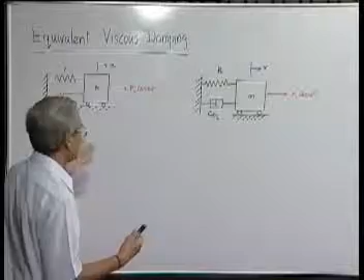Let us take a particular case, it can be anything, like a Coulomb damped system. Here the energy dissipation mechanism is different, it is not viscous, and the equations we get obviously are not linear equations that can be readily solved. We have solved the free vibration problem using various techniques, but suppose such a system is subjected to a harmonic excitation, what will be the response if we have to find out?

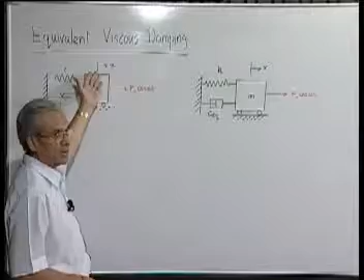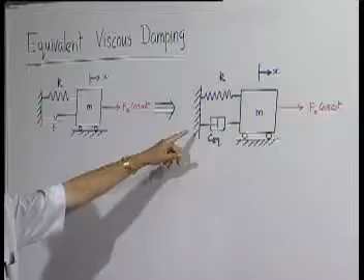So one approximate way of managing this kind of problem is to convert this system to an equivalent system where the stiffness, mass, etc. are the same as the original one. Only thing we have done is the Coulomb damping has been represented by a viscous damping here with a coefficient of damping C equivalent. Now what will be the condition for this equivalence?

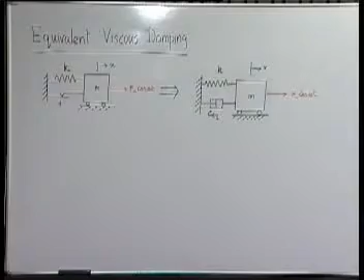One obvious thing that comes to mind is that the job of this damping mechanism is to dissipate energy. So for the same amplitude, whatever may be the dissipation of energy per cycle, if we maintain that as equal in the two cases, we can give some logical support to our consideration that this is an equivalent damping mechanism.

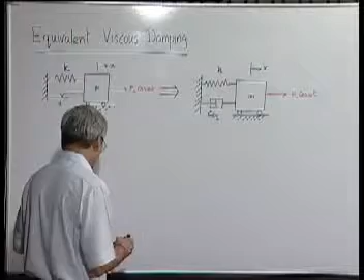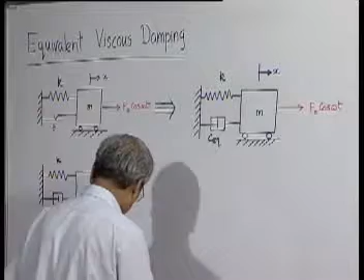So to do that, let us first find out, in case of a viscously damped system, what is the energy dissipated per cycle, with amplitude of displacement x, when it is subjected to a harmonic force F0 cosine omega t. What is the amount of energy dissipated per cycle? Here the only place where energy is being dissipated is this dashpot part, neither here nor here. So let us see how much energy is dissipated in this dashpot part.

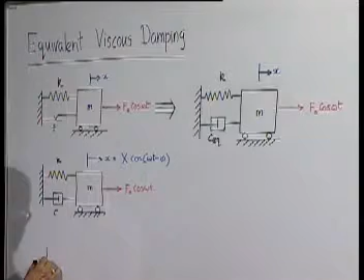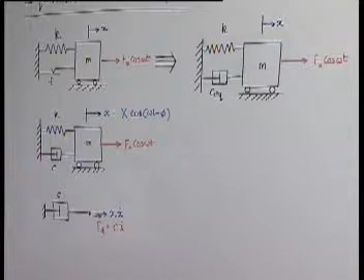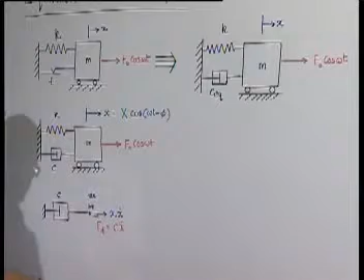Now at any instant, this position also has a displacement x, velocity x dot, etc., and the force acting here, we call damping force Fd, which is equal to C into x dot, where C is the coefficient of damping in this dashpot. So at this instant, if it goes by an elemental distance dx, and this force actually acting on this point is in this direction, since this point is moving in this direction, it is subjected to a drag which can be represented as this. The energy lost due to this drag force because of this displacement dx will be dEd equals Fd into dx.

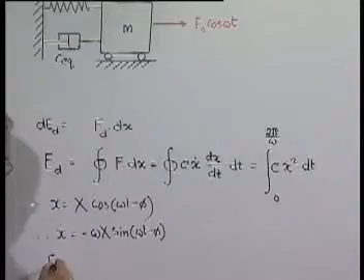So per cycle, energy dissipated will just be the integrated form of this for a whole cycle, Fd into dx, which we can write as Fd is nothing but C into x dot, and dx can be written as dx/dt into dt, and therefore this can be written as C x dot squared dt, t varying from 0 to a time period. Time period is nothing but 2 pi by the circular frequency omega. Now we know that x is capital X cosine omega t minus phi, so x dot is nothing but minus omega X... substituting it here, we get Ed equals C omega squared X squared sine squared...

This is integrated over a full cycle. We know this can easily be written as C omega X squared sine squared theta d theta, theta equal to this, for a full cycle from 0 to... we can make another transformation, making sine squared psi d psi from 0 to 2 pi, and this is nothing but pi. I'm not going through the detailed calculation, it's a standard result in trigonometry. The energy dissipated per cycle is pi C omega X squared.

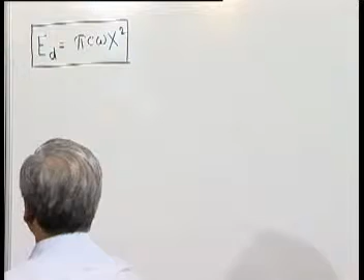Now here, therefore, the energy dissipated per cycle will be pi C equivalent omega X squared, and the actual energy dissipated in the real system will be Ed. So therefore we can always write that the equivalent damping coefficient will be the energy dissipated per cycle in the real system divided by pi omega X squared.

If you use this expression for the damping coefficient and use the results of the standard viscously damped single degree of freedom system under harmonic excitation, we can get the result. But before we apply it to this, let us also find out whether it matches the energy input.

This is the amount of energy dissipated per cycle, but since the system is in steady state, its amplitude of oscillation does not change. So the amount of energy dissipated per cycle must be replenished by the energy input by the exciting force, which is doing work on the system. That can be easily found out: the amount of energy input per cycle is nothing but F into dx.

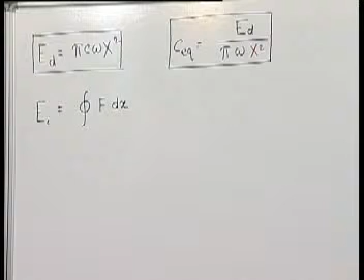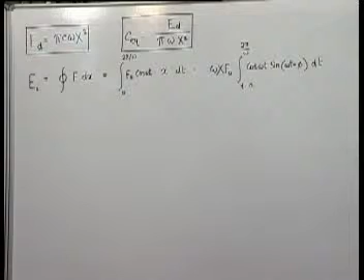F is the applied force, and this is again nothing but... and finally we know x, so x dot is already here. So this will be, and this minus sign we need not keep here. So that is the energy input, and if we solve this integration, we will get the result by standard result again, which will be pi X F0 sine phi.

So we get two different expressions, one for energy dissipation, other for energy input per cycle. The obvious question that comes to mind is: are these the same? It must be the same in the steady state. So therefore one has to substitute the expression for x and phi.

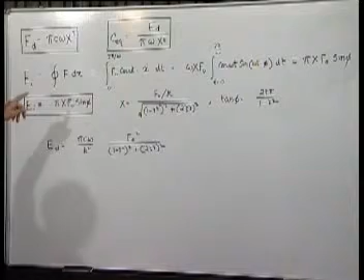Using these two, it can be proved easily that Ed and EI are the same, and trigonometry, so I am avoiding it. You can show that Ed is equal to, when you substitute the expression for x from here, this will be the expression for Ed. Similarly, when you substitute, sin phi can be found out from tan phi. It will be the square root of 1 plus cot square phi, inverse of that. So using that, one can also show that this will be the same thing.

The algebra one can satisfy himself. So therefore, Ed is equal to EI in this steady state, which is a very obvious thing, because otherwise it will not be in steady state.

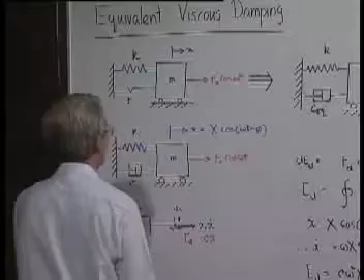So the technique for solving a problem where the dissipation mechanism is not viscous, and such a system is subjected to harmonic excitation, and we have to find the response: it is first better to find out the energy dissipated per cycle in the real actual system, then find the equivalent damping coefficient for a system where the energy dissipation will be the same with viscous damping, and then assume that system will have a similar response, though the results will not be exact. It will give us only an approximate idea about the response of the system.

So if we apply this, for example, to this particular case with Coulomb damping, what will be the response? Let us try to see. Let us solve this problem and find out what will be the oscillation or the response.

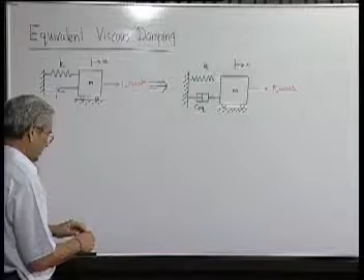Now, first is to find out C equivalent. How did we find out C equivalent? That is the total energy dissipated per cycle in the real system divided by pi omega x square. How much is it, if suppose x is x cosine, that kind of thing: if the amplitude of oscillation is capital X, then for each half cycle the displacement of this Coulomb damper is 2x.

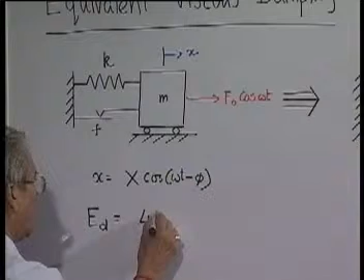So energy loss will simply be 2Fx because the friction force is constant. Similarly, on the other half cycle it will again have another displacement which is 2x, and again the energy dissipated will be 2Fx. So in total, the energy dissipated per cycle in case of this Coulomb damping is nothing but 4x into F. This is the total displacement and this is the constant friction force, which is opposing the relative motion, and so 4x into F is the energy dissipated.

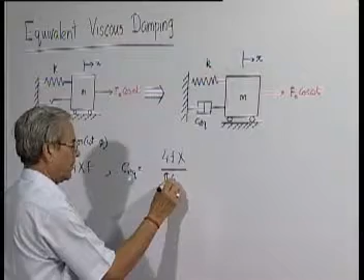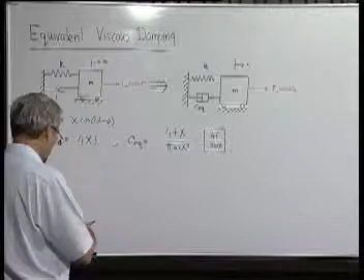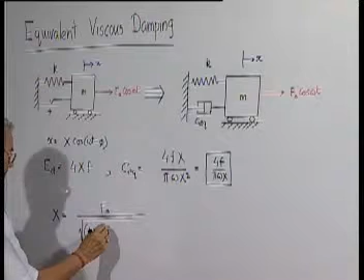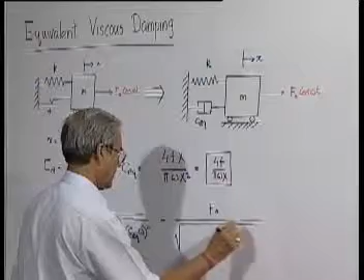We will use a slightly different form of the result. This is the amplitude of oscillation. Phase difference we are not interested in immediately. So this is where we have applied this equivalent damping coefficient. Now substituting this, C omega into C equivalent into omega will be simply this.

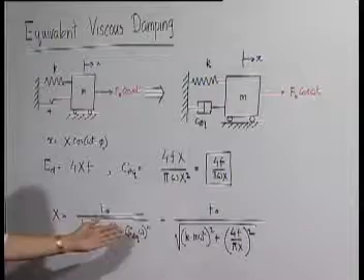So what we get is actually an equation in capital X, but remember we should always use this approximation symbol. So squaring both sides, we get capital X square is approximately equal to... and from this we get X will be approximately equal to... so this is the expected amplitude of oscillation of the Coulomb damped system when subjected to harmonic excitation.

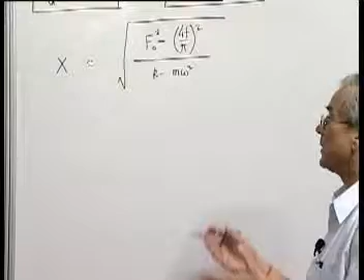But we have to always keep in mind that the result is very approximate, and all the characteristics which we find, for example here it is found that if f0 is less than 4f by pi, it will have no amplitude because it becomes imaginary. But in reality, if we apply a force to a Coulomb damped system whose magnitude is 4f by pi, which is more than f, because 4 is more than pi, it is definitely going to oscillate with some positive and real amplitude. Similarly, we also notice that when the applied frequency equals the undamped natural frequency, root over k by m, then the denominator is 0, meaning it will never approach any steady state.

That means the characteristics will be similar to that of an undamped system with single degree of freedom. This is a very important characteristic, but when f0 is much larger than f, etc., then the value of x will be approximately equal to the value of x in the real case.

But we should not try to make a deeper understanding using this expression for this system, because this does not satisfy the whole thing exactly. Anyhow, there may be other kinds of damping, like say structural damping.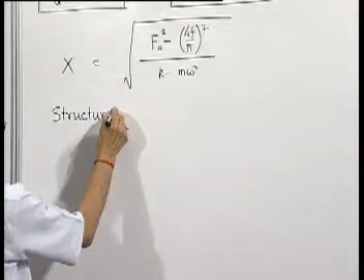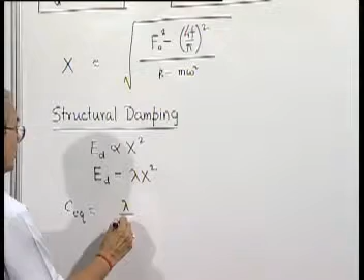In structural damping, in most cases, energy dissipated per cycle is proportional to the square of the amplitude, so we can write Ed is equal to some coefficient, say lambda. So in such cases the equivalent damping will be, where h is nothing but lambda by pi, and h is the coefficient of hysteretic damping.

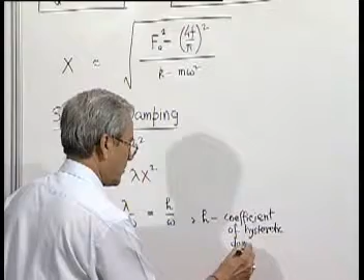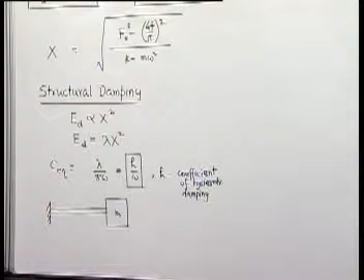So here we find the equivalent damping coefficient for a structural damping system is independent of x. For example, if you have a beam, a cantilever, at the end there is a block, now if you want to solve this problem when this system is subjected to a dynamic force.

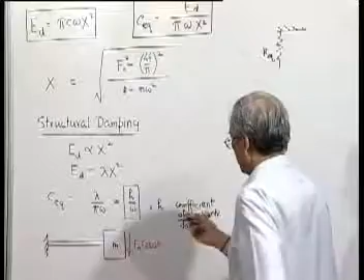This can be replaced by an equivalent system. This is K equivalent, the stiffness of the spring, and this cantilever beam when a force is applied at the end is the same, and the structural damping is replaced accordingly. So if the flexural rigidity of this be EI and length of this be L,

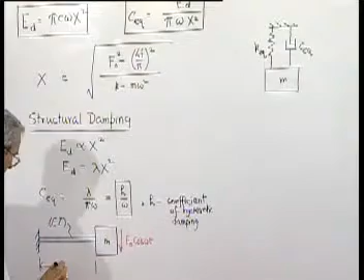then we know that when a unit load is applied here, the deflection of the system is L cube by 3EI. So if the deflection is force divided by 3EI into L cube, its equivalent rigidity is going to be simply 3EI by L cube.

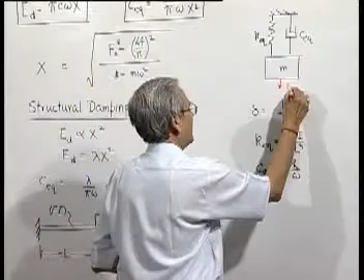Similarly, C equivalent is going to be, ED which is C equivalent is going to be H by omega. So when it is subjected to a harmonic force now, the displacement which we will get, x, will be F0 divided by, where you have to just use C equivalent omega is simply H, and K equivalent is this.

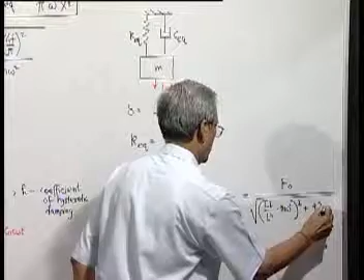So therefore we get, again remember it will be an approximate, because this equivalence is not exact. So it gives us some method of approximately solving the cases where the dissipation is not viscous and the resulting equations of motion of the system will not be linear. We convert the system into an equivalent viscously damped system, find the equivalent damping coefficient, and treat the system as viscously damped.

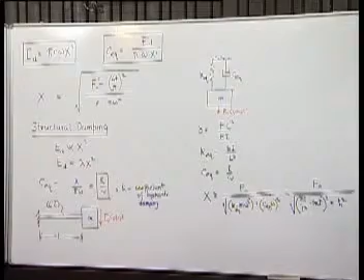So far we have been discussing the cases where a dynamic system was being excited with the help of either a force or a moment applied at a suitable location. But it has been mentioned at the very beginning that there can be other methods of excitation, and one very common and frequently found situation is where the support of a system is oscillated.

For example, if there is a pendulum, I can oscillate it by applying a force to the ball or the pendulum bob, but I can also oscillate it by moving the support of the pendulum. So this kind of system is called a system with base excitation.

Even this has a lot of application, because in vehicles, the whole vehicle is supported on springs, and the wheels which touch the ground may be wavy. So when it goes, the wheel is given an up and down motion. So what will be the motion of the vehicle?

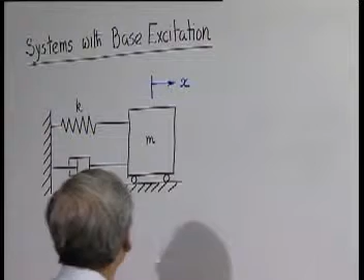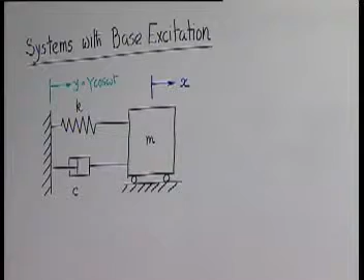and now we are exciting this mass not by applying a dynamic force here, but by providing a harmonic oscillation to the base or the foundation. It could be the other type also.

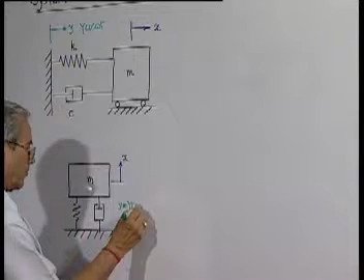So this is very common, something is resting and the ground is vibrating, or this is vibrating, or a pendulum, the point of support or the hinge is oscillating. So these are all cases of excitation given through a displacement of the support.

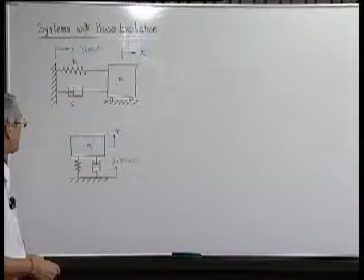Now, the equation of motion, we will try to solve this problem. So its displacement, velocity, acceleration, they are all this. The forces acting will depend on the amount of stretch of the spring at any instant, which obviously will be x minus y, because the amount of stretch will be the displacement here plus this minus displacement.

Similarly, the damping force will be the relative velocity between the two ends of the dashpot. The equation of motion, therefore, m x double dot is nothing but the total force in this direction, which is minus c into x dot minus y dot, minus k into x minus y, or we can rewrite this equation in this form.

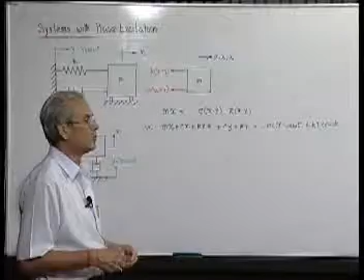So, therefore, we find that the right hand side again is a harmonic function of time. So, the equation becomes identical to what we have solved for force excitation. Only thing is that f0 cosine omega t is being replaced by this.

So, we can solve the equation, but as I have mentioned to you, sometimes it is much easier to solve a problem by using the technique of rotating vectors. So, let us apply that.

So, this is the left hand side and this is the right hand side. So, these two must be equal. So, how much is kx?

It is represented by a rotating vector, small k capital X. Cx dot is represented by the vector leading this by 90 degrees and with a magnitude c omega x. Mx double dot is this.

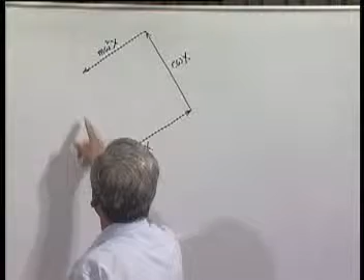And this result must be same as cy dot plus ky. Ky can be something like this, and cy dot will be

another rotating vector leading the y vector by 90 degrees, and this plus this must be equal to the sum from this differential equation, and the whole thing is rotating like a rigid body, as you know, and actually the real quantities are always projections of these onto one plane, in this case maybe the horizontal plane.

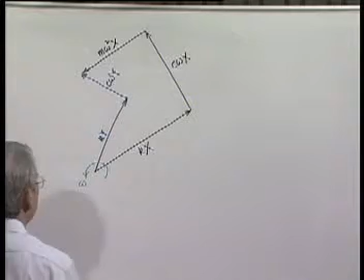So, one thing we find here is that the phase difference between the excitation, that is y, and the response, that is this, is this. But more importantly, let us find out the expression for x in terms of y and other quantities.

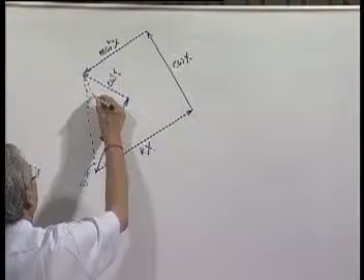So we do one thing, we find out this length. How much is this? This can be this square plus this square, and this is equal to k minus m omega square x square, that is this square, and this is nothing but c omega x, and this must be ky square plus c omega y square, or

easily we get x square is equal to y square into... now if we divide both the numerator and denominator by k square, we get... now c omega by k is nothing but 2 zeta r in terms of those parameters we should utilize now. And here it is again 1 minus r square whole square, again 2 zeta r whole square.

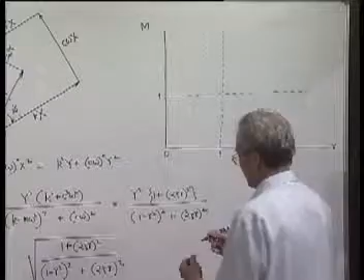So, when zeta is 0, no damping, it will be 1 by 1 minus r square. So it is our... that is for zeta equal to 0.

Of course, we should always remember that we should do that. Now, when zeta is equal to infinity, extremely large, then this 1 is negligible, we can keep only 2 zeta r whole square. Again this becomes negligible because zeta is very large. So the numerator and denominator are the same irrespective of the value of r. So m becomes independent of r and is equal to 1.

So that case is... it is also easy to imagine that zeta infinity means it is a rigid connection. So, whatever will be x, same will be y, or whatever will be y, same will be x.

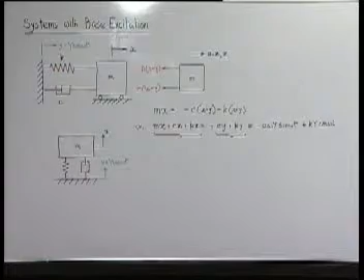So, therefore, here also we find that in such a case the ratio of the response to the excitation depends on the damping coefficient, or damping factor, and the frequency ratio.

So, for example, if we operate in this range, what happens? We get a substantial response if we provide some excitation. But if we design our natural frequency such that the exciting frequency is much larger, then obviously you are operating somewhere here, r is very large, and then the response is much smaller than the excitation. So, though the ground may be vibrating substantially, the actual system we are interested in, its vibration may be small. We will come back to this point again, but before we close this particular discussion, let us solve

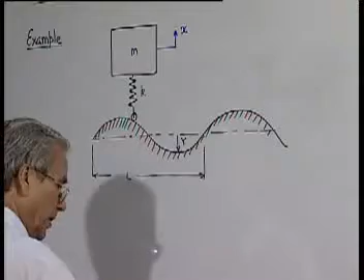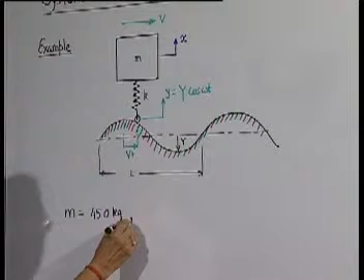Now we give the problem like this: for a particular case, m is given to be 450 kg, the speed is given as 96 kilometer per hour, the wavelength of the sinusoidal road is approximately 6.1 meter, and the amplitude of variation is 0.025 meter, that means 2.5 centimeter, about 1 inch.

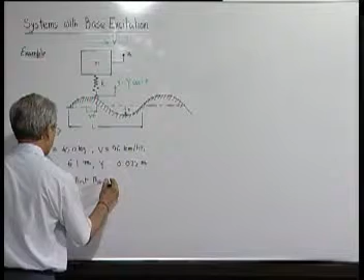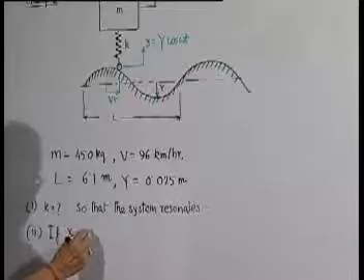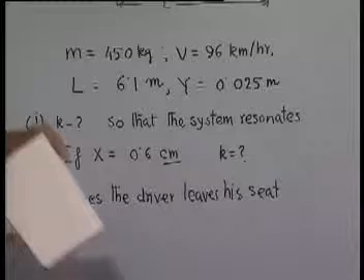The problem has three parts. First: how much will be the k so that this system resonates. Second: if x has to be 0.6 centimeter, what will be the value of k? And third: does the driver leave his seat, if the seat and driver on which he is sitting gets disconnected?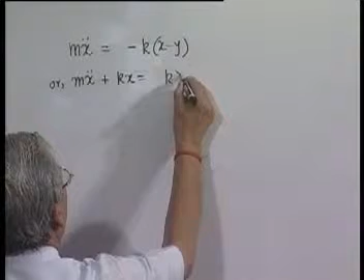So in this case, the equation of motion is simply m x double dot equals minus k into (x minus y), no damping, or m x double dot plus k x equals k y cosine omega t.

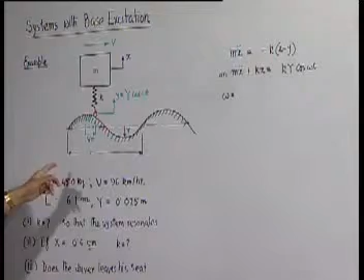And we should keep in mind what omega is. When the vehicle is moving at speed v, how many cycles will it complete in unit time? It will be v by L, since v is the distance moved in unit time, and L is the distance required to complete one cycle. So the number of cycles completed in unit time is v by L, and each complete cycle represents 2 pi of rotation of the vector representing this harmonic quantity. So omega is 2 pi times v by L. From this we can find the k for which the natural frequency will again be the same.

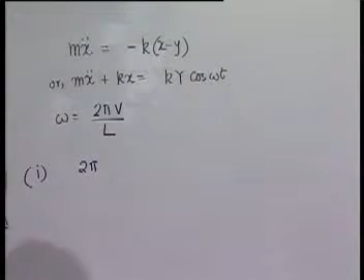So for part 1, for the system to resonate: 2 pi v by L, where v is 96 kilometer per hour, equivalent to 27 meter per second. So we need 2 pi into 27 by 6.1 to equal square root of k by 450. This gives k equal to 34 into 10 raised to 4 Newton per meter. Then the system will resonate.

Next, we have to find out: if it goes at this speed and the driver or block mass has an amplitude of 0.6 centimeter, that means 0.006 meter, what will be the stiffness necessary? For the second part, we know that x by y is given by...

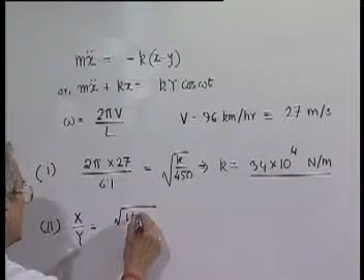square root of 1 plus 2 zeta r whole square, but zeta is 0 in this case. So this becomes 1 by (1 minus r squared), and this equals 0.006 divided by 0.025. This leads to r equal to 2.275.

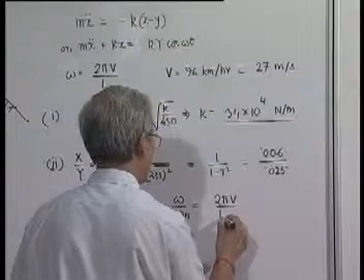That means r is equal to omega by omega n. Omega we already found is 2 pi v by L, and omega n is square root of k by m. So 2 pi into 27 by 6.1, divided by square root of k by m, with m equal to 450, we can utilize here. This is a simple equation for k, and that gives us k equal to 6.57 into 10 raised to 4 Newton per meter.

So that is the answer for the second part. The third part wants us to check whether, during this motion, the driver will leave the seat.

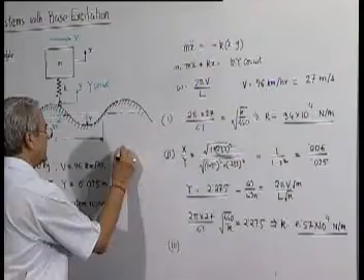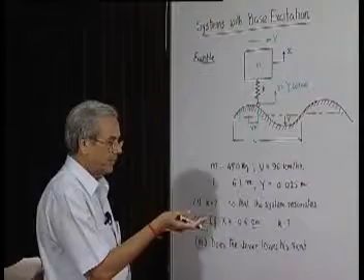Now, to do that, we keep in mind that if this platform or vehicle is moving up and down, and during the downward motion the acceleration with which the driver's seat is falling is more than g, then the driver, falling only under gravity, will leave the seat, he will float. So we have to find the maximum acceleration of the seat or vehicle in the downward direction, which is equal to omega squared x.

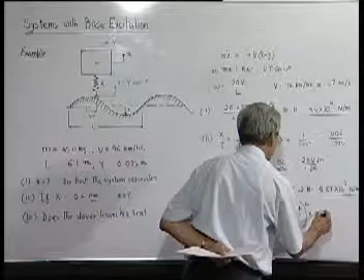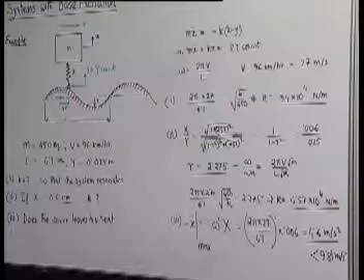Under this condition, omega is known: 2 pi into 27 by 6.1, squared, and x is equal to 0.006. This we find is 4.6 meter per second squared, which is less than 9.81, which is g. Therefore, at any time the acceleration of the seat on which the driver is sitting is not going to exceed 4.6, and that being the maximum, far less than the acceleration due to gravity, the driver will always remain on the seat.

So he is not going to leave the seat under this condition. This is a simple problem, but it illustrates the basic principle. We will take up further discussion on this.